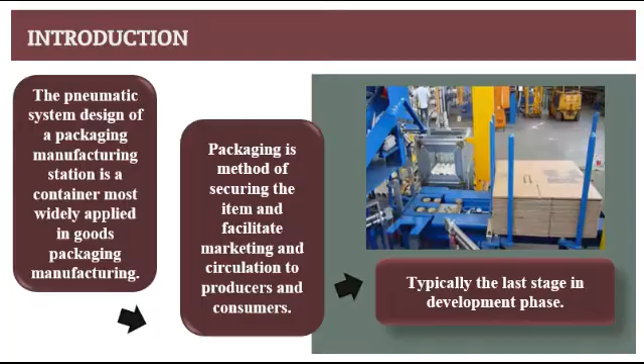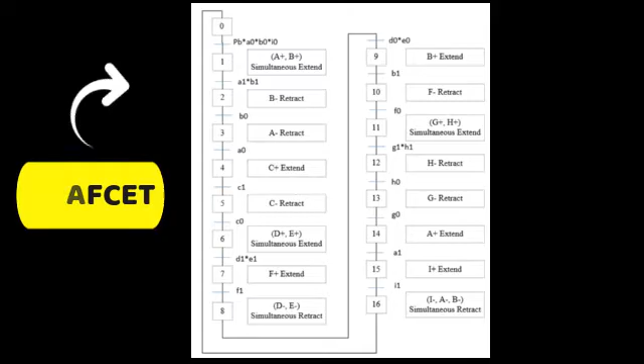For the pneumatic circuit using cascade design, 9 cylinders were used at the carton box model unit and packing station. Double acting cylinders were used, and a 5/2-way valve and non-sustained type of valve was connected to each of the cylinders.

So, in manifold line 01, when PB is pressed, the air will flow through the 5/2-way pneumatic valve 2 and will trigger sensor B1 at manifold line 01, which makes cylinder A and cylinder B go to extend condition, while the 5/2-way pneumatic valve will change its position to A+ and B+, and the air flow pushes the cylinders to fully extend.

Next, for manifold line 02, after cylinders A and B fully extend, the airflow will go through the 5/2-way pneumatic valve 3 and it will trigger sensor C1 at manifold line 02, which makes cylinder C extend. Then, it will trigger sensors A1 and B1 that make cylinders B and A retract.

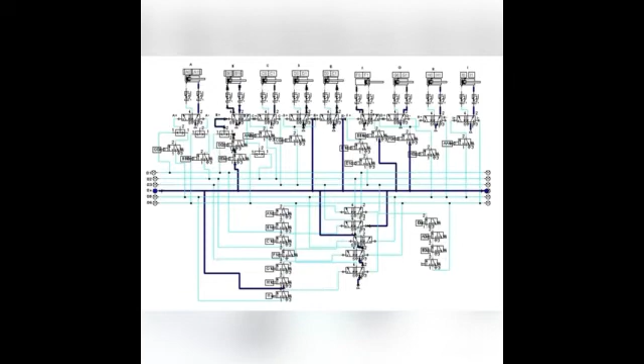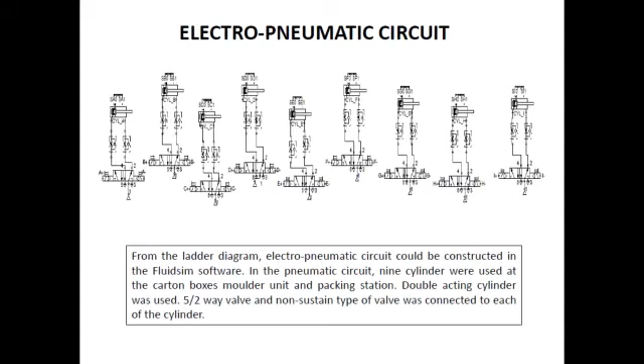From the ladder diagram, the electro-pneumatic circuit could be constructed in the FluidSIM software. In the pneumatic circuit, 9 cylinders were used at the carton box's molder unit and packing station. Double-acting cylinders were used. A 5/2-way valve and non-sustained type of valve was connected to each of the cylinders. In the electro-pneumatic circuit, for retract operation, a roller switch was used, and for extend operation, a proximity sensor was used.

The start push button and K23 will activate group 1, K1, and the holding circuit K1 will hold the circuit. K1 will allow current to the solenoid valve A+ and B+ and energize the solenoid coil. It will actuate A+ and B+ at the 5/2-way valve and allow air to flow to cylinders A and B. Cylinders A and B will extend.

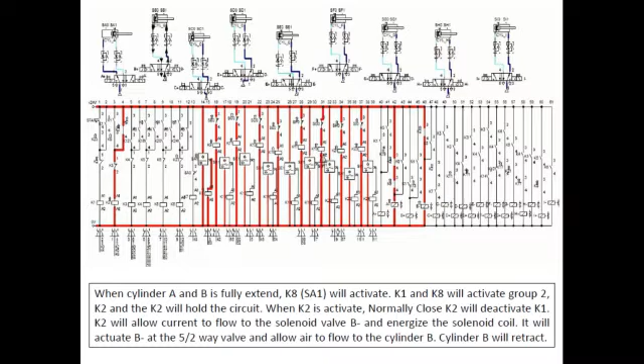When cylinders A and B are fully extended, K8 will activate. K1 and K8 will activate group 2, K2, and K2 will hold the circuit. When K2 is activated, normally closed K2 will deactivate K1. K2 will allow current to flow to the solenoid valve B- and energize the solenoid coil. It will actuate B- at the 5/2-way valve and allow air to flow to cylinder B. Cylinder B will retract. When cylinder B is fully retracted, K9 will activate.

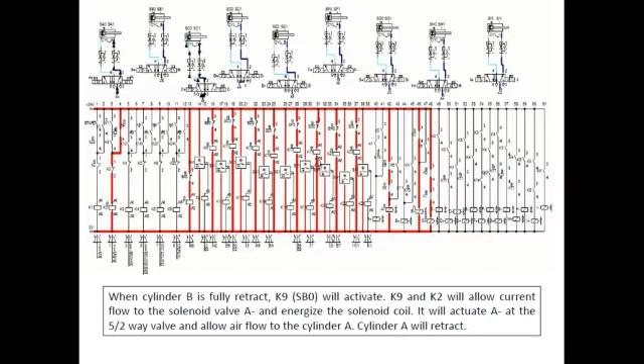K9 and K2 will allow current flow to the solenoid valve A- and energize the solenoid coil. It will actuate A- at the 5/2-way valve and allow air flow to cylinder A. Cylinder A will retract. When cylinder A is fully retracted, K7 will activate. K7 and K2 will allow current flow to the solenoid valve C+ and energize the solenoid coil. C+ at the 5/2-way valve will actuate and allow air flow to cylinder C.

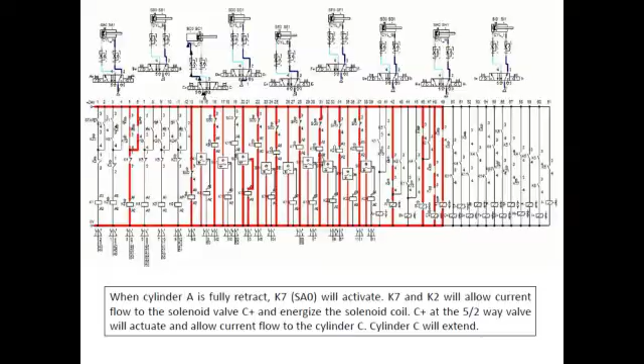Cylinder C will extend. Group 3, K3 will activate when cylinder C is fully extended. K2 and K12 will activate K3, and the holding circuit K3 will hold the circuit. Normally closed K3 will deactivate K2. When K3 is activated, it will allow current flow to the solenoid valve C- and energize the coil.

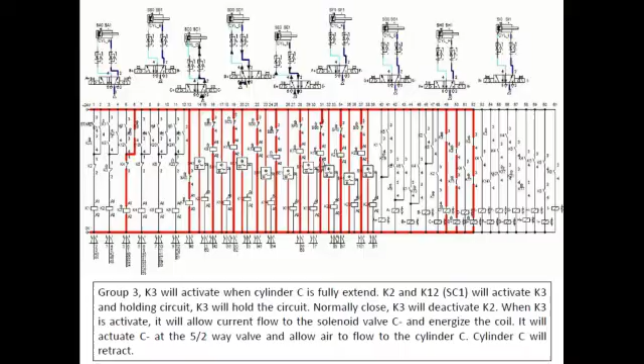It will actuate C- at the 5/2-way valve and allow air to flow to cylinder C. Cylinder C will retract. When cylinder C is fully retracted, K11 will activate.

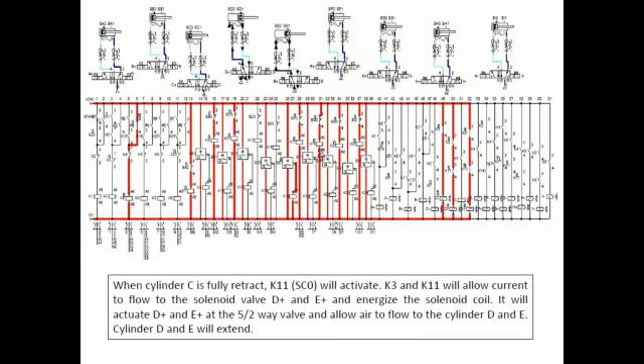K3 and K11 will allow current to flow to the solenoid valves D+ and E+ and energize the solenoid coils. It will actuate D+ and E+ at the 5/2-way valve and allow air to flow to cylinders D and E. Cylinders D and E will extend. When cylinders D and E are fully extended, K14 and K16 will activate.

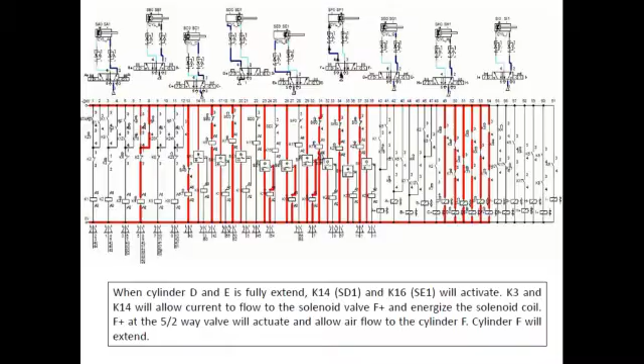K3 and K14 will allow current to flow to the solenoid valve F+ and energize the solenoid coil. F+ at the 5/2-way valve will actuate and allow air flow to cylinder F. Cylinder F will extend. When cylinder F is fully extended, K18 will activate.

K3 and K18 will activate group 4, K4, and holding circuit K4 will hold the circuit. Normally closed K4 will deactivate K3.

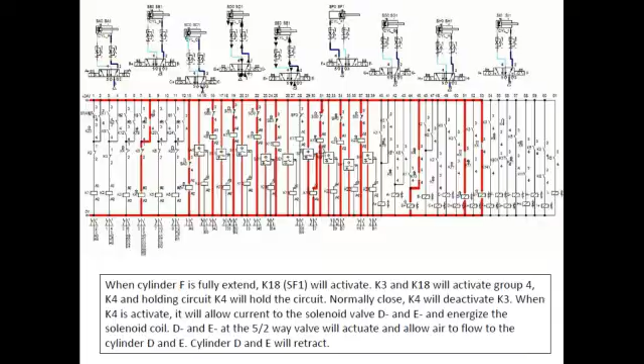When K4 is activated, it will allow current to the solenoid valves D- and E- and energize the solenoid coils. D- and E- at the 5/2-way valve will actuate and allow air to flow to cylinders D and E. Cylinders D and E will retract. When cylinders D and E are fully retracted, K13 and K15 will activate.

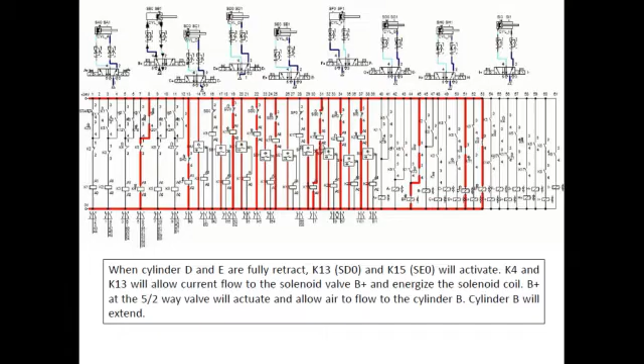K4 and K13 will allow current flow to the solenoid valve B+ and energize the solenoid coil. B+ at the 5/2-way valve will actuate and allow air to flow to cylinder B. Cylinder B will extend. When cylinder B is fully extended, K10 will activate.

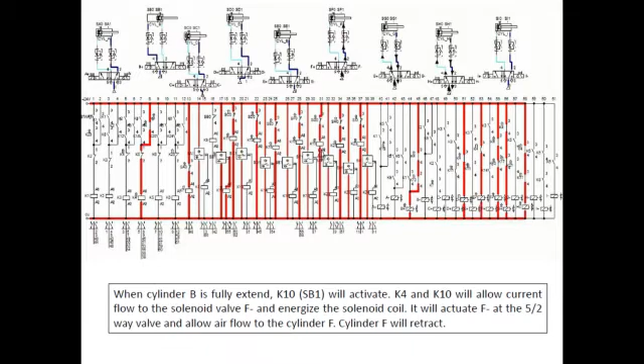K4 and K10 will allow current flow to the solenoid valve F- and energize the solenoid coil. It will actuate F- at the 5/2-way valve and allow air flow to cylinder F. Cylinder F will retract. When cylinder F is fully retracted, K17 will activate.

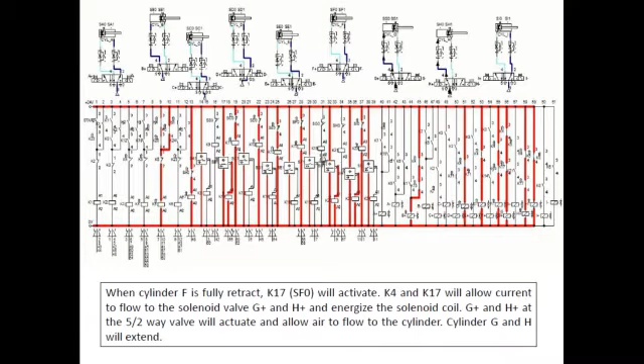K4 and K17 will allow current to flow to the solenoid valves G+ and H+ and energize the solenoid coils. G+ and H+ at the 5/2-way valve will actuate and allow air to flow to the cylinders. Cylinders G and H will extend. When cylinders G and H are fully extended, K20 and K22 will activate.

K4 and K20 will activate group 5, K5, and holding circuit K5 will hold the circuit. Normally closed K5 will deactivate group 4, K4.

When K5 is activated, it will allow current flow to the solenoid valve H- and energize the solenoid coil. H- at the 5/2-way valve will actuate and allow air to flow to cylinder H. Cylinder H will retract. When cylinder H is fully retracted, K21 will activate.

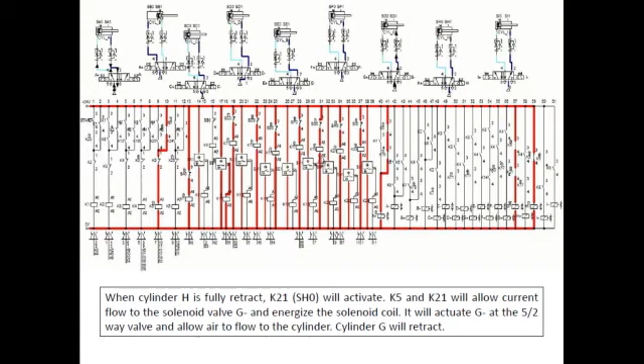K5 and K21 will allow current flow to the solenoid valve G- and energize the solenoid coil. It will actuate G- at the 5/2-way valve and allow air to flow to the cylinder. Cylinder G will retract. When cylinder G is fully retracted, K19 will activate.

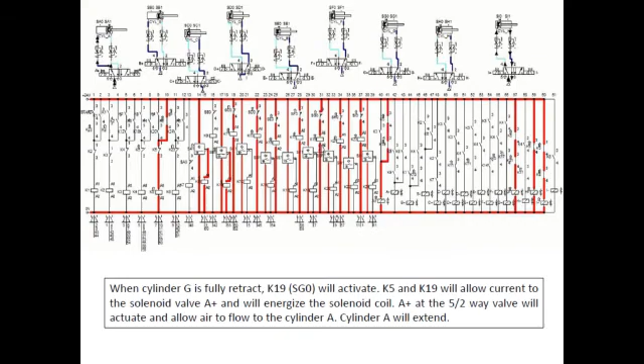K5 and K19 will allow current to the solenoid valve A+ and will energize the solenoid coil. A+ at the 5/2-way valve will actuate and allow air to flow to cylinder A. Cylinder A will extend. When cylinder A is fully extended, K8 will activate.

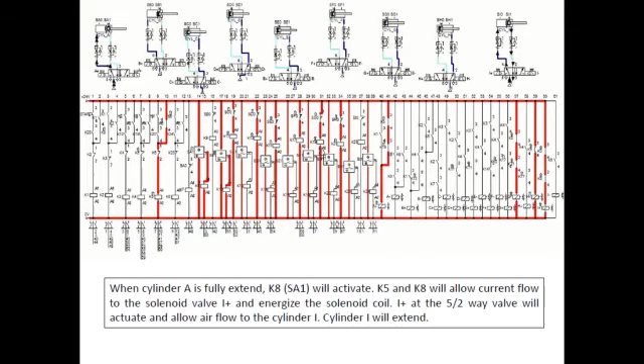K5 and K8 will allow current flow to the solenoid valve I+ and energize the solenoid coil. I+ at the 5/2-way valve will actuate and allow air flow to cylinder I. Cylinder I will extend. When cylinder I is fully extended, K24 will activate.

K5 and K24 will activate group 6, K6, and holding circuit K6 will hold the circuit. Normally closed K6 will deactivate group 5, K5.

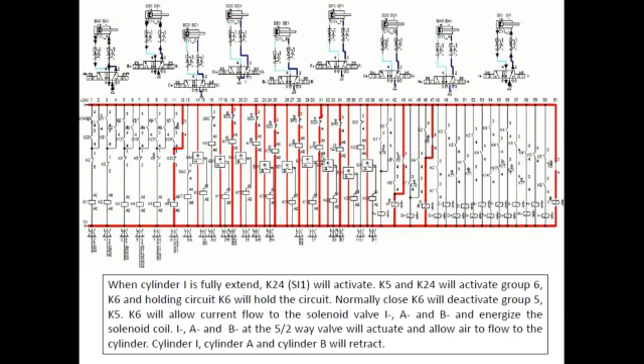K6 will allow current flow to the solenoid valves I-, A- and B- and energize the solenoid coils. I-, A- and B- at the 5/2-way valve will actuate and allow air to flow to the cylinders. Cylinders I, A and B will retract. When cylinders I, A and B are fully retracted, K23, K7 and K9 will activate.

Normally closed K23 will deactivate group 6, K6. When the start push button is pressed again, it will repeat the same process.